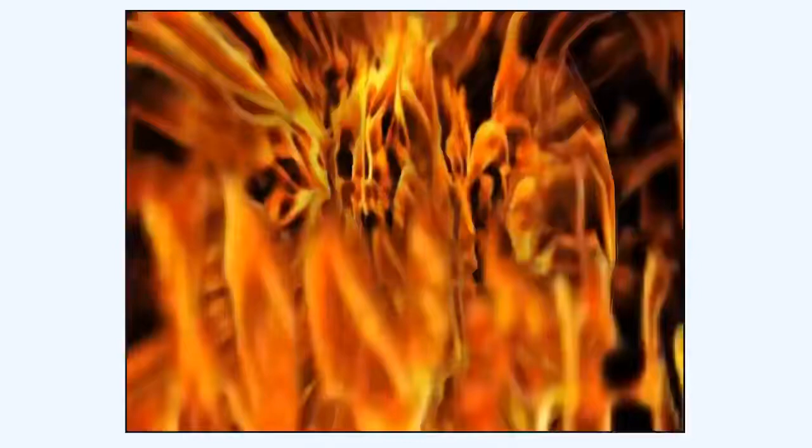When normal combustion takes place, the compressed charge in the cylinder is ignited by the spark and burns steadily with a flame speed or flame rate of 60 to 80 feet per second, giving a steady and smooth temperature and pressure rise in the combustion chamber.

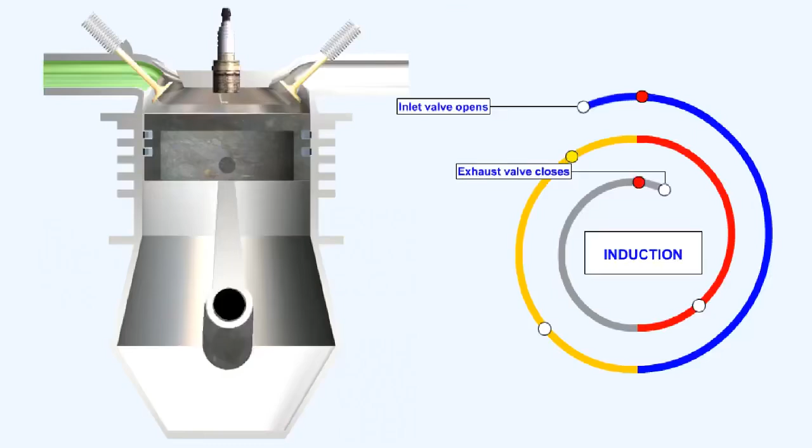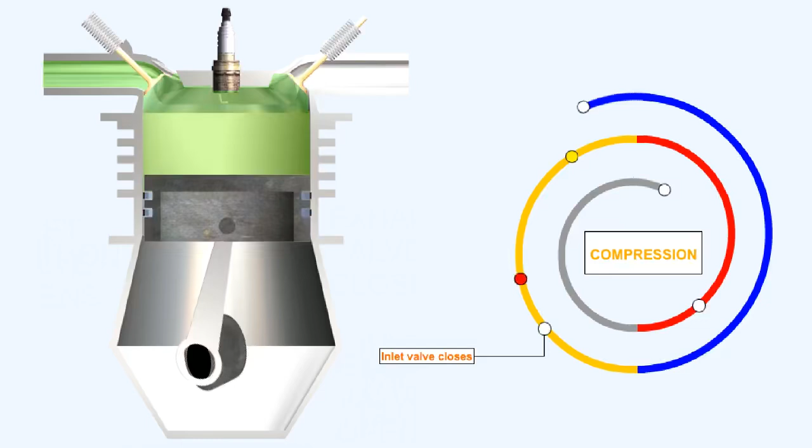Maximum pressure will be generated when combustion has been completed, and ideally this should occur when the crank is at 8 to 10 degrees after top dead center, where, because of the ineffective crank angle, the volume of the combustion chamber is still at a minimum. Should maximum pressure conditions arise in advance of this, that is, at or before crankshaft top dead center, the engine would tend to run backwards, which we will not attempt to reproduce.

The flame rate can vary slightly. For instance, the mixture will burn faster if it's made richer, or if the pressure in the cylinders increases. An instance of both of these events occurs on takeoff, when it's necessary to increase the mixture strength in order to ensure stable combustion because the engine is producing high power. The action of selecting a rich mixture shortens the time required for combustion. Therefore, a faster flame rate results.

Conversely, if the mixture is weakened, perhaps in order to gain a better specific fuel consumption, the ratio of the weight of fuel to air changes, such that there is more air, and therefore nitrogen, per unit weight of fuel. You'll remember that nitrogen is responsible for slowing down the flame rate, and, as a consequence of its increased proportion, a slower flame rate results.

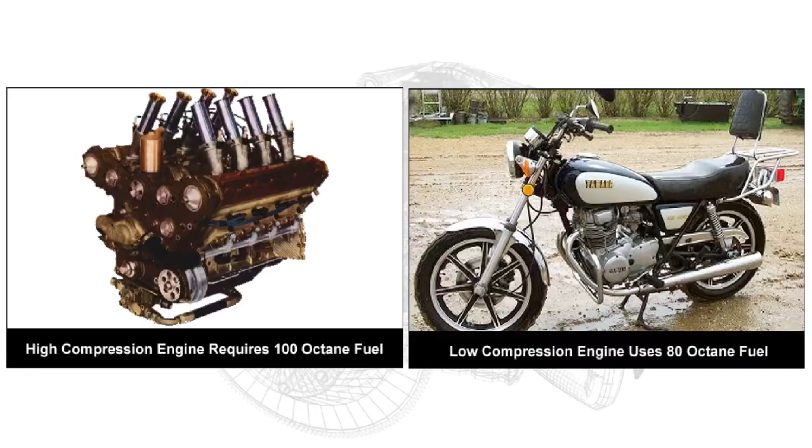The higher that the pressure of the fuel-air mixture can be raised before combustion, the higher will be the pressure of the burning gases. Consequently, the greater will be the power output and thermal efficiency of the engine. The compression pressure is governed by the compression ratio of the engine, and is limited by the tendency of the fuel to detonate or knock.

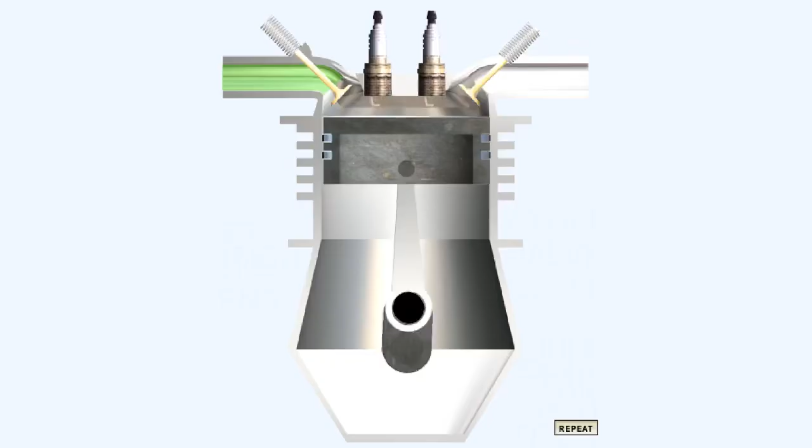During normal combustion, the flame travels smoothly and steadily through the mixture, as the advancing flame front heats the gases immediately ahead of it, so that they in turn burn.

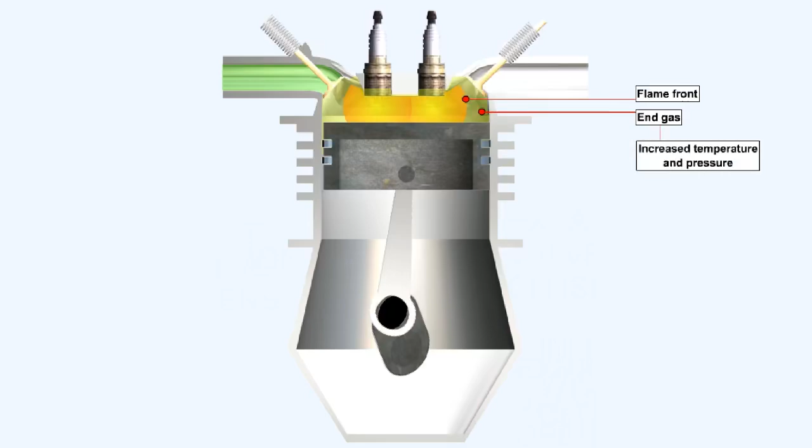Detonation, on the other hand, occurs after ignition and is unstable combustion. Progressively more and more heat is concentrated in the flame front, which is brought to bear on the remaining unburnt portion of the mixture, termed end gas, and its temperature is raised. In addition, the burnt gases have expanded, so that the end gas is subjected to an increasing pressure. Ultimately, there is sufficient pressure and heat available to bring all the end gas to the point of combustion at the same instant, and it explodes with a rapidity comparable to that of a rifle shot.

The flame rate increases to 1,000 feet per second, with a degree of violence which will depend on the amount of end gas that remains.

You would be correct in assuming, from what we've just said, that detonation will be encouraged by excessive temperature, pressure, or prolonging the time taken for combustion to take place, or a combination of any of these. We'll now discuss these conditions.

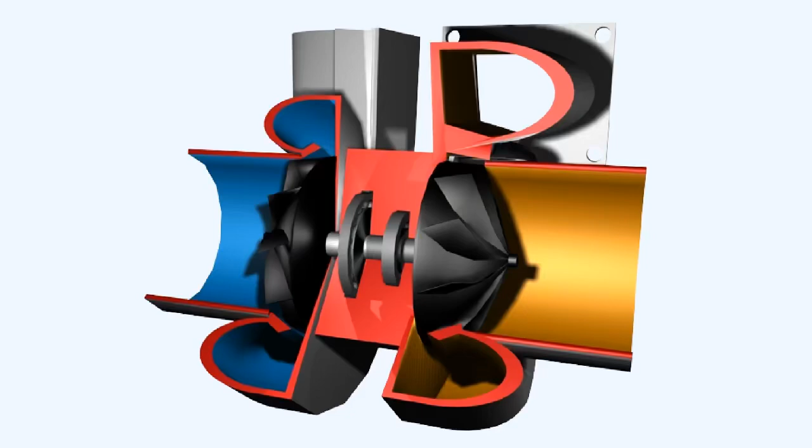Any condition that heats the charge before combustion will aggravate matters in the end gas. Preheating the air before it enters the engine, the use of hot air to overcome carburetor icing, or overcompression in the supercharger or turbocharger may well give rise to excessive charge temperatures.

Once burning has started, the process should not be prolonged, because the formation of the peroxides and fulminates which trigger the explosion takes time to occur. Anything which can reduce the time needed to burn the charge also reduces the possibility of detonation occurring.

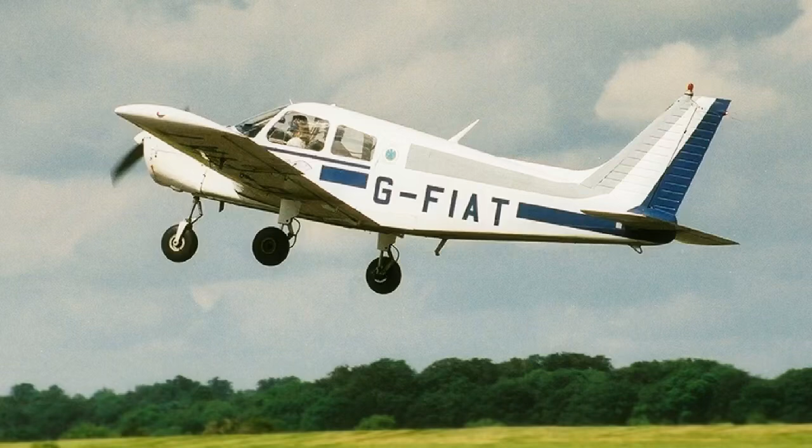Running conditions can also exacerbate the situation with regard to detonation. For instance, under high power conditions, the pressure in the cylinder can be so great as to encourage the formation of peroxides.

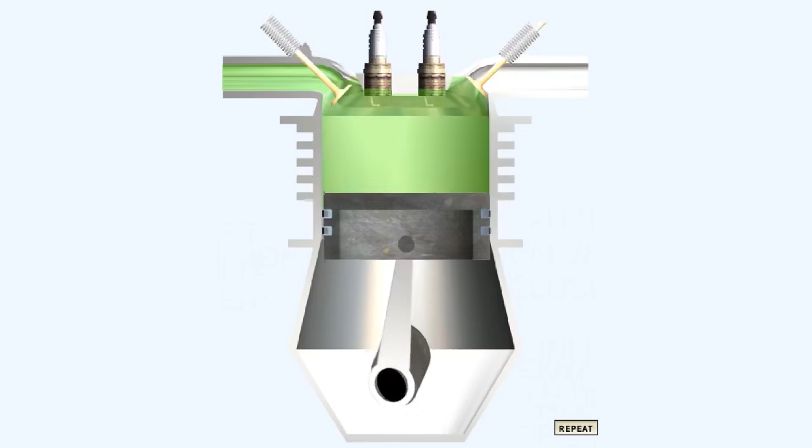To recap then, anything which can reduce the temperature and pressure of combustion, or the time it takes, will be instrumental in reducing, or at the very best, preventing the creation of detonation.

So what particular steps can we take to prevent detonation happening? It seems that anything which will reduce either the temperature or pressure of combustion, or the time it takes to occur, will assist in this task.

The use of carburetor heat at high throttle settings, say above 85% power, or in high ambient temperatures, will increase the chance of detonation occurring. Therefore, its use in these situations is firmly discouraged.

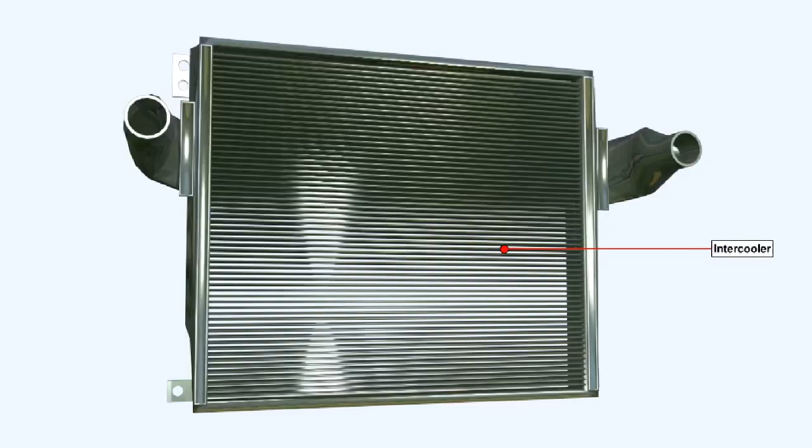Turbocharging or supercharging will both increase the temperature of the charge before it gets into the cylinders. The use of an intercooler will assist in bringing down the charge temperature.

The weaker the mixture selected, the hotter will be the temperature of combustion. Conversely, if the mixture is made richer, it will burn cooler and more quickly, thus providing two ways of combating detonation.

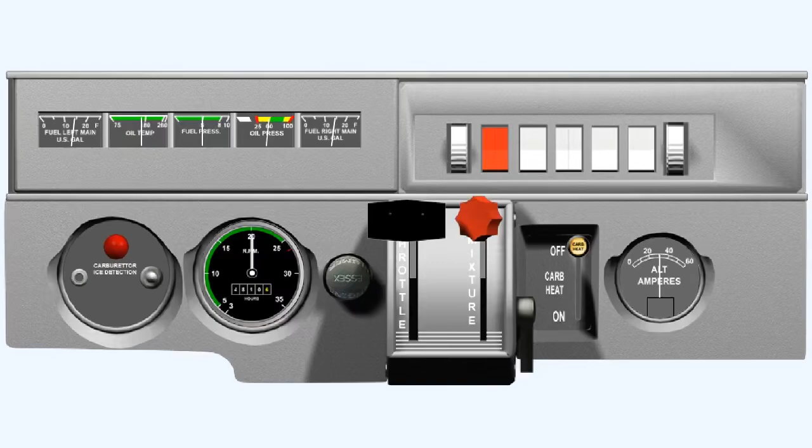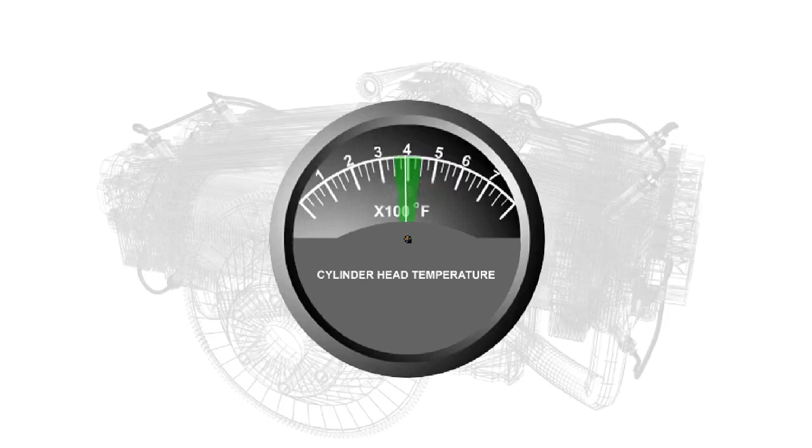Running engines at the optimum cylinder head temperature, and ensuring that regular maintenance prevents the formation of carbon deposits inside the engine, are sure methods of minimizing the occurrence of detonation.

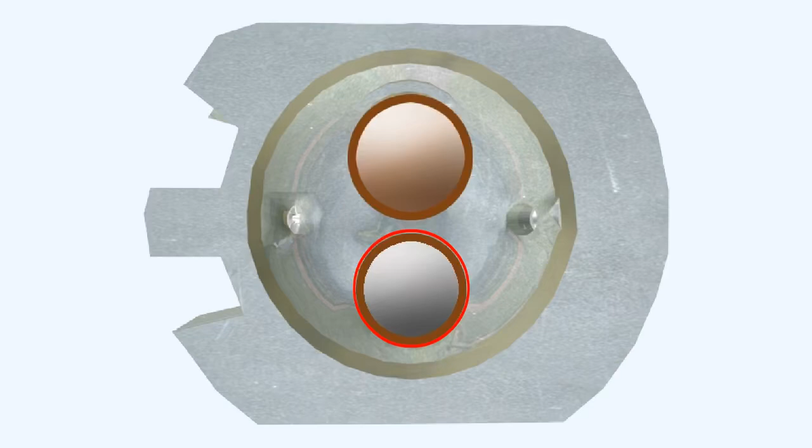If possible, the flame should be started from the vicinity of some hot spot, such as the exhaust valve, so that the end gas is pushed away from the hottest parts of the combustion chamber and compressed into a cooler part.

One way of reducing the time taken for the flame front to travel across the combustion chamber is to initiate the flame simultaneously from two spark plugs.

Certain running conditions can also assist in delaying the onset of detonation. For example, the same power may be obtained at a higher engine speed by using a finer propeller pitch.

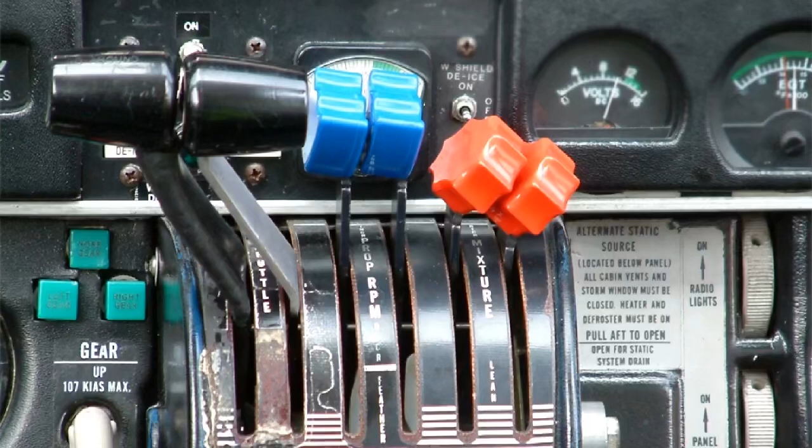This enables a smaller throttle opening to be used, which helps in two ways. The smaller throttle opening reduces the cylinder pressure, and the higher running speed cuts down the time available for detonation to develop.

A third way of reducing the time it takes for the flame to travel across the combustion chamber is to design the combustion chamber and the inlet ports in such a way as to cause turbulence to occur within the incoming mixture. This will have the effect of accelerating the flame front.

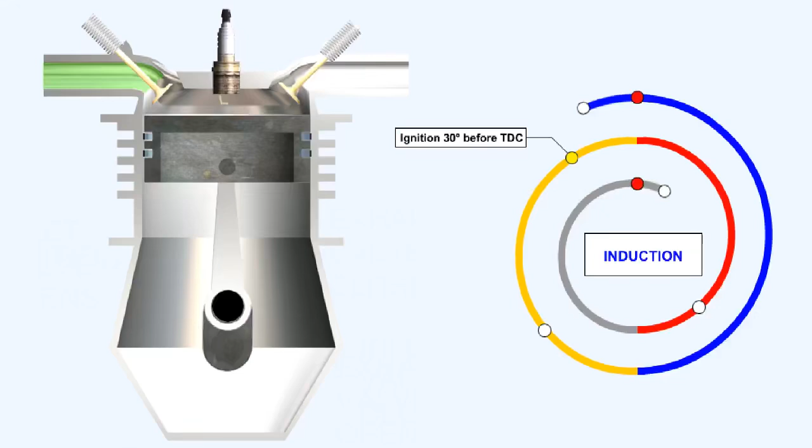We've already stated that the ignition is timed to ensure that all combustion will have been completed by the time the crankshaft has rotated about 8 to 10 degrees into the power stroke.

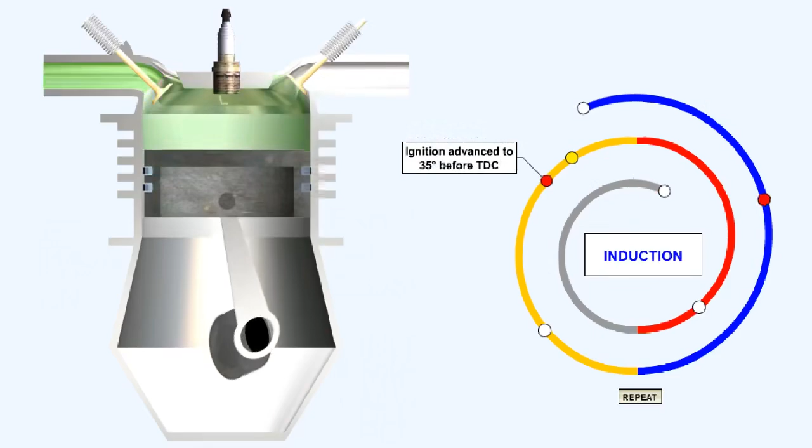Advancing the ignition timing, in other words igniting the mixture too early, will cause cylinder pressures to rise too rapidly, generating peroxides and fulminates, and thus detonation will occur.

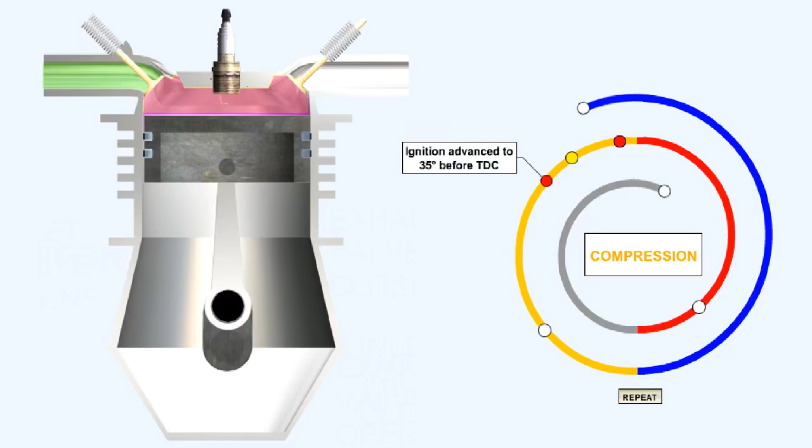Maintaining the correct ignition timing will thus help to prevent detonation, by maintaining the combustion pressure at a level which will not produce the ingredients of detonation.

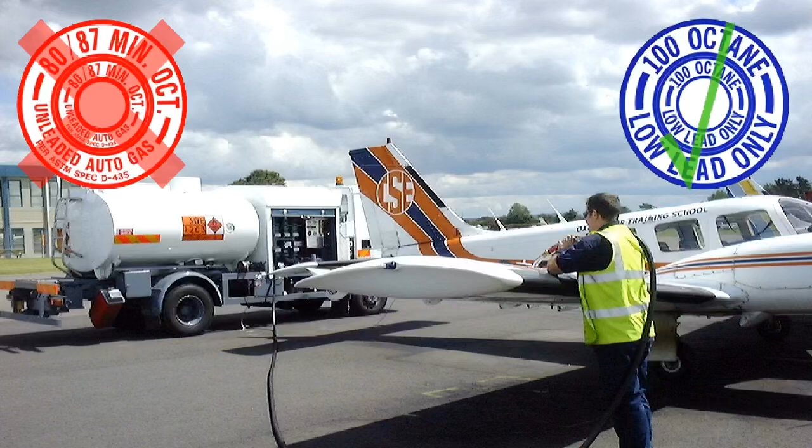It's important that the recommended octane rating of the fuel for a particular engine is used. If a fuel with an octane rating lower than that which is recommended is used, it will promote detonation, especially under high power conditions.

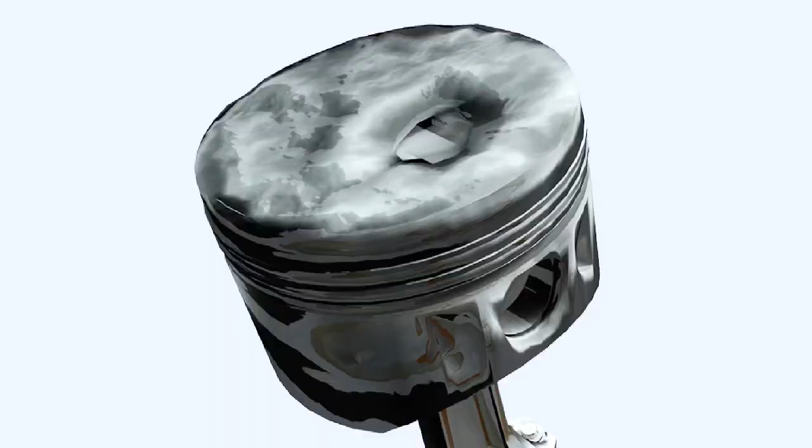The explosion of the end gas can cause the piston crown to burn, and eventually to collapse. Overheating of the combustion chamber can also occur.

This picture shows a piston which has been severely damaged by detonation. The piston crown has been burnt, and eventually it's disintegrated.

Detonation may cause the valves to split and distort. It can also possibly burn the sparking plug electrodes. The damage shown here is consistent with being caused by detonation.

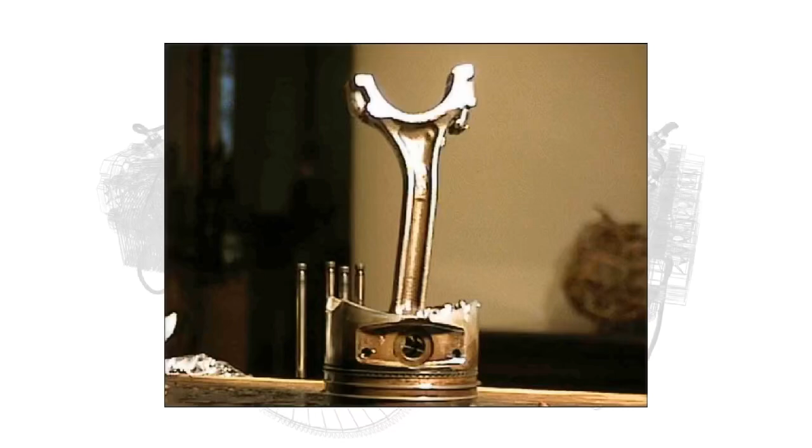There is also a sudden rise in pressure as detonation occurs, which applies a shock loading to the engine component parts, which may cause mechanical damage, particularly to the big end bearings and even the connecting rod, although the case shown here is extreme.

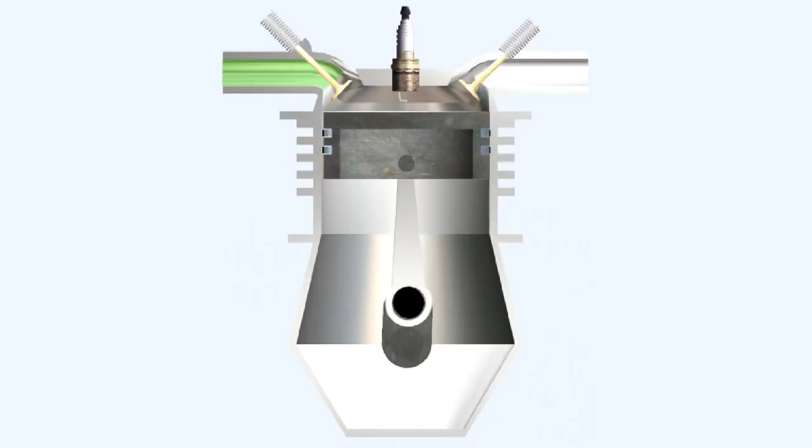Finally, because the maximum pressure is generated before the piston is in the correct position to utilize it, the piston has to overcome a high back pressure, and power is lost.

The fact that detonation is occurring can be recognized by a metallic knocking sound, sometimes called pinking, which is caused by the violent vibrating pressure waves striking the walls of the combustion chamber.